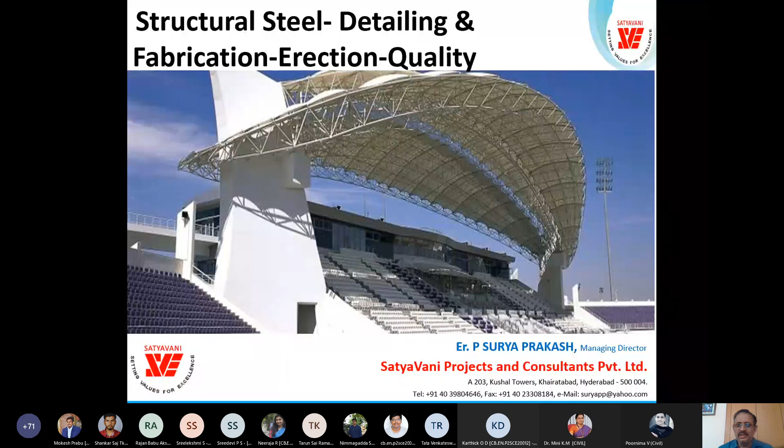However, today I'll focus on structural steel detailing and fabrication, erection and quality, because in structural steel, more than analysis and design, detailing is a challenge actually. That's why I choose steel structures detailing as the subject always. Of course, I teach design, I teach pre-engineered buildings, all these subjects, but I feel whenever we talk about steel, it's very important to talk about detailing aimed at taking care of fabrication, erection, and maintaining the quality. So these are the important aspects.

So the overview of my talk today is I'll give a brief introduction and I'll talk about steel structures, and then we'll move on to the topic of detailing engineering, which is about erection details, because when we talk about steel structures, it's not something that we do at site. We fabricate off the site in a workshop, bring those steel elements and erect them, join them on site. So engineering that method of joining, method of erection is a big subject actually. So we should understand these erection methodologies, and we should always do the detailing considering that erection.

That's what I'm going to explain with all the illustrations that I am taking today, with the drawings and photographs of the works done. But you have to be alert, my dear students, because I'm going to cover about 300 slides in a matter of 1 hour or 1.5 hours.

So please keep pace with me, keep noting the points, and raise your doubts at any time. I hope they can ask me questions anytime, madam. They can unmute and ask questions. Yes, they can. That's good. So you can ask me questions anytime, students, and I'll be more than happy to answer your doubts. But don't allow me to move forward if you have any doubt or if you have not understood any of my word or sentence. Okay.

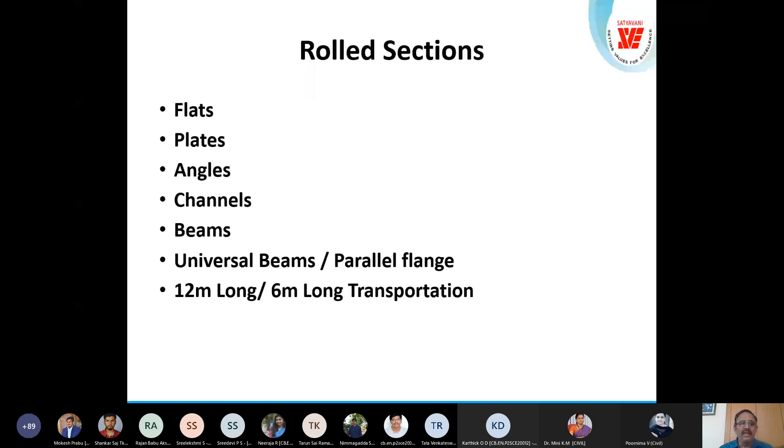So detailing now, we are coming to the topic. So we have modules in the structure. Sometimes we do the modular erection, like a truss. If you have seen a long span, 18 meters, 24 meters span, there we'll be using the modules of truss and erect with the erection joint on the site. So erection method determines how to detail. So we can do the welding for one segment or module, second segment and third segment, and we join these segments on the site as we erect, lift from the ground and put the erection bolts we call.

And we do the joint details bolted or welded depending on this erection method, and the cut lengths are determined in the detailing itself. When we detail the drawing, we determine the cut length, how much length we have to cut, 3 meter, 3.5 meter. And end details connection is very important. Fabrication, then galvanize. Why galvanize? Because steel has 3 disadvantages mainly. The first disadvantage is compression, buckling. Steel is not good in buckling, though it has enormous strength in tension.

In compression, it buckles, L/R ratio, based on the buckling curves, and so we have to take care. Second disadvantage is the fire rating. What is fire rating? You must be aware of World Trade Center. Luckily, because it is designed properly, the World Trade Center withstood the fire for the design fire rating. That's why people could escape.

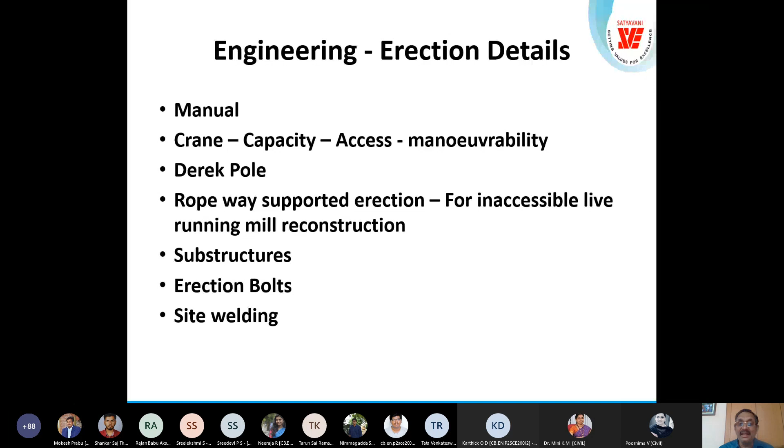And make the substructures, you must be aware, you can also Google Mohali. They have done a 10-story building in steel in 48 hours exactly in India, Mohali. So it is done by using the substructure concept. That means the entire floor is fabricated and assembled off-site, and floor-wise it is brought and erected. That is another biggest technology that is available. And erection bolts and site welding, we have to take care while doing the erection detailing.

Each element fabrication detail we have to do, that is called the shop drawing, because the fabricator in the workshop will blindly follow the fabrication drawing, cut the length and cut the ends, edges, punch the bolts and all that. I'll show you the drawings, you will understand better. I'm taking more time initially explaining this because when I show the pictures, you can capture what I'm saying. Another important thing I want to tell you is, you must make a practice to write whatever you hear.

Now, whatever I'm telling, you must note. That's why I told Poornima madam to inform you to keep the pen and book with you so that you will write whatever I'm telling, so that it will be registered in your mind. And when I show the pictures, I'll run very fast. I'll probably cover all 250 photographs and drawings in 30 or 40 minutes. Okay, be ready. So you remember all these things so that you can correlate with what I show as we move forward.

And fabrication process is cutting, bolt hole punching or drilling. We can do punching up to 12 mm thick and drilling beyond 12 mm. And gauge lines, bends, end cuts, grinding, welding, and a schedule of fabrication line also. You know, there is a Tekla software in which you can schedule the whole fabrication, stacking, transportation, erection also. And each flange we will give the view and or web, you know, in case of beam. And these drawings are made in 1:10 scale.

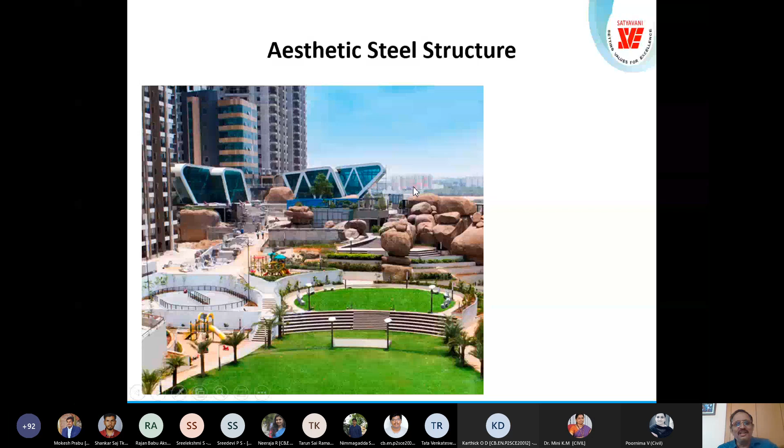And this is the closer view of that structure, steel structure and boulders. You can see nature. We built the structure with the nature. And you can see the bent shape of this and the bent sheets and a truss, huge truss in a steel frame, you know. And the architect has used the aesthetics of this, and we designed matching his requirement. And this is another photograph of the same. And this is during construction. You can see how it looks during construction. And this is a deck slab, and this is a huge 60,000 square feet of clubhouse.

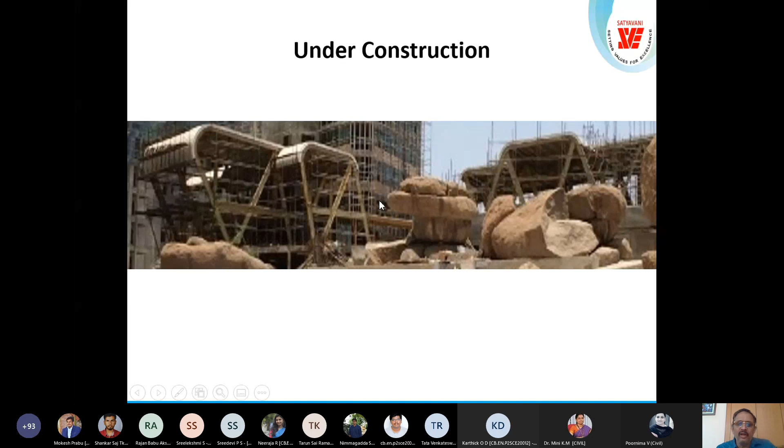And we also have a seven-storied guest house, again on the boulder zone, without conventional foundation. So please, and this is another recent edible oil refinery project we completed in Andhra Pradesh, in Kakinada, and this was in Hyderabad. And this is in Kakinada. We did a chimney and all these refinery structures, boiler structures and all. Mostly for these industrial structures, we prefer steel because of the convenience of erection and flexibility in planning and design. So these are the other photos of these steel structures.

Here you can see the bracings, the steel bracings. We have X bracings, and this is a diamond here. And normally we have two types of structures. You know, you have a framed structure. In a framed structure, please, what I'm telling now is a very important point which many people mistake or make errors in, and failures happen. This is very, very important. Please note. So here, this beam connection with the column, we have to detail as a moment connection. Otherwise, you can see a portal with 4 hinges is unstable. You all know. You can't even analyze. So either you have to introduce the bracings, or you have to design it as a what you call moment connection.

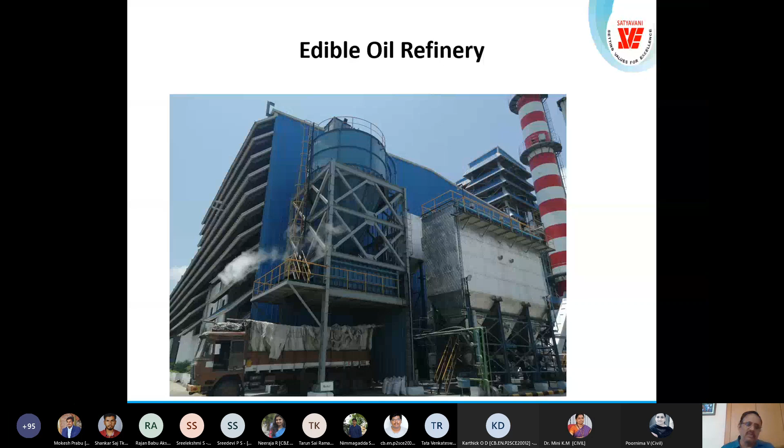And here you can see the bracket. This is a strut, and this is a tie and strut model. So in steel structures, if you know the method of joints and the method of sections, you'll be able to analyze very easily. In fact, it is very accurate. Even if you do all the analysis on a computer, you get the same forces. So I can analyze and predict the forces very quickly.

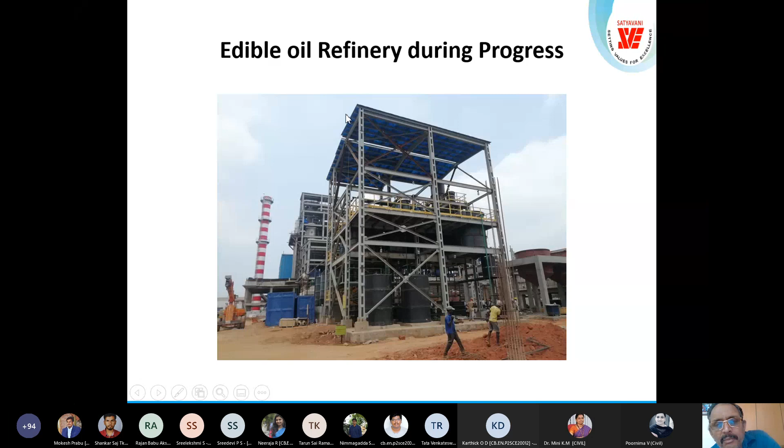And this is a normal floor with beams and a deck sheet. This is a GI deck sheet. We put the concrete on top of it. It's a column, beam, and the rafters, sub beams. And you can see these are tapered again, castellated sections. We have the simply supported design, so we have the maximum moment here, so we have put the tapered section with maximum section depth here. You can see the varying depth. So at the support we design only for shear. We don't transfer the moment to the web. Whenever you are connecting to the web of the beam, you can't transfer the moment. The web is primarily a shear member, you know, and flanges take axial tension and compression. So that's the beam actually.

Any beam will have how many forces? Axial force, shear force in 2 planes, and you have the flexure in the primary plane, flexure in the secondary plane, and torsion. In open sections, torsion resistance is negligible, they can't resist it. So we cannot transfer the torsion, and as per the code, any compatibility torsion you can ignore actually. That's why we give it as a simply supported beam. So as a structural engineer, you can choose how you want it to behave actually. So we give only the shear connection here, as a simply supported beam, and that is the most economical.

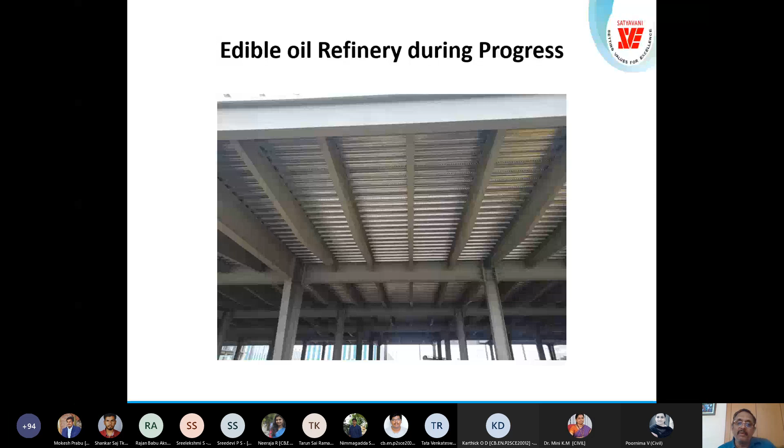And it's a composite deck actually. So this deck sheet is welded to this, and the concrete also is connected to this beam by shear studs, so that the compression is taken care of by this concrete, and tension in the slab is taken by this. I have designed even a deck slab without reinforcement actually. I just put the deck sheet and concrete with fiber reinforcement. That is also possible. So these are all the structures. Here you can see a nice parallel chord truss actually, beam action. So shear is taken by this bracing, and axial force from flexure is taken by the top chord and bottom chord. So these are all the different types of structures you can see in this.

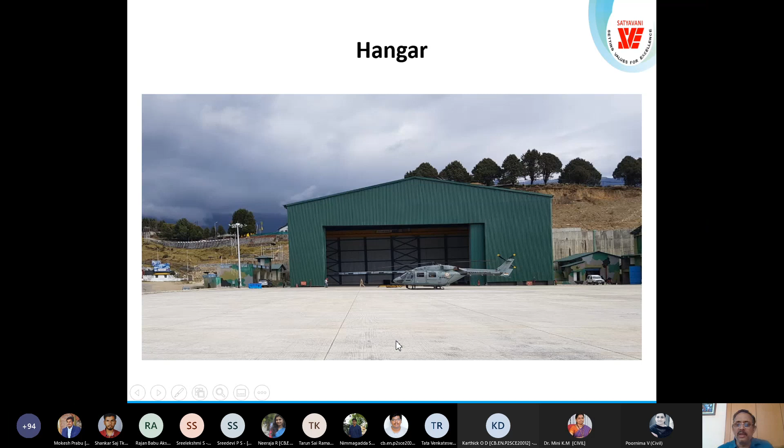And this is another. So this is another hangar structure we designed at 13,000 feet above mean sea level. That means the temperature here will go below minus 30 degrees. And we designed this with doors of 30-meter width. It will collapse automatically. So that kind of steel structure is also interesting. It's a 40 meter span where these defense helicopters will be maintained inside. So this project we have done, and this is during construction, a very interesting structure. And we designed heating inside, and it was a very interesting concept for me also. I learned it for the first time about 3-4 years back: normally in industrial buildings we put the skylight.

You know, in defense buildings they don't want skylight, because at nighttime, when you have the light, people can see. That is a disadvantage of skylight. So this is the first time we designed without skylight in a large steel structure. Very interesting. So many things we keep learning as we work.

So you must only pray to God to give you the opportunity to work, then the rest of the things, knowledge comes with it. You only need to possess the intellect required for that. So this is the closed door, you know, I told you, 30 meters automatic sliding door. This also we designed. Very interesting.

And now these steel sections, I was explaining angles, T section, channel, I-beam, and double. These are built-up sections, you know. This is back-to-back or star angle, and we have double beam with built-up section plates, and we have double channel box section or batten section, and we have the circular or round hollow section, square or rectangular hollow sections. These are all the types of rolled sections we use in the design.

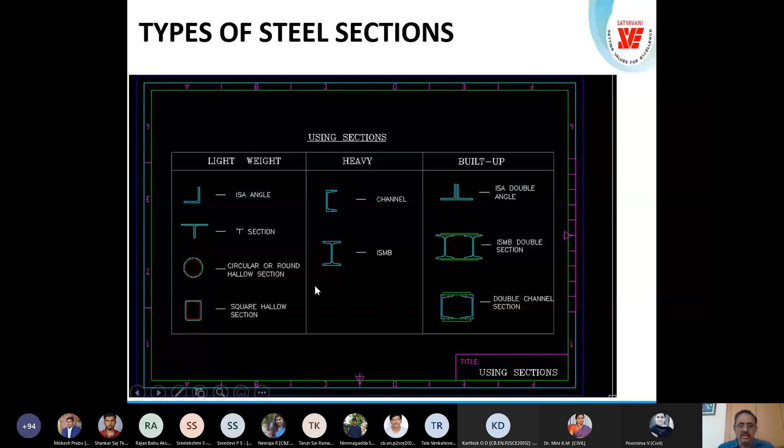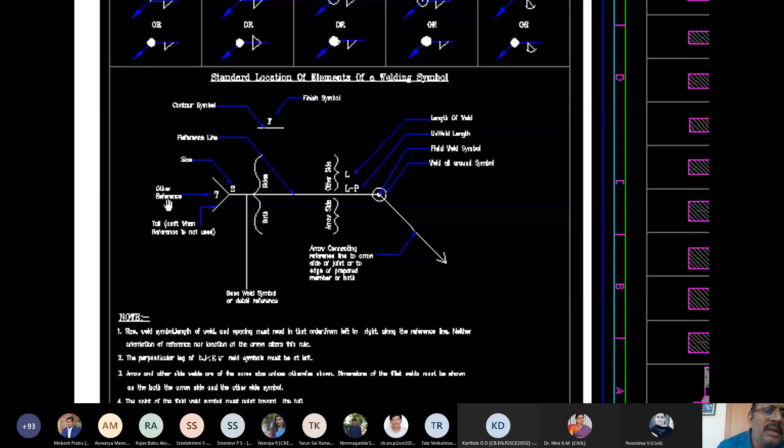This is the arrow I told you. On the arrow, if you show which side is this, and on the same side of the arrow, it means you weld where I have shown only. If you put the detail here, you weld, and the length of weld we indicate here, that is 100 mm or 200 mm, and this is the length of weld, and field weld or all round weld. So this spot is field, that means on the field actually. So these are the details you can see, and of course this is all given in the code. I have just reproduced what is given in the code only.

And so you can see this is the fillet weld. I'm showing you here, you will understand better. And these are 2 members you have to join. This is a square butt, and this is single V butt. You can understand from the figure. That's why the figure speaks much more. And double V butt weld, and a single U butt weld, and a double U butt weld, and this is single bevel butt. You can imagine the difference here and here. Okay, here you are welding 2 equal thicknesses, and here you are welding 2 different thicknesses.

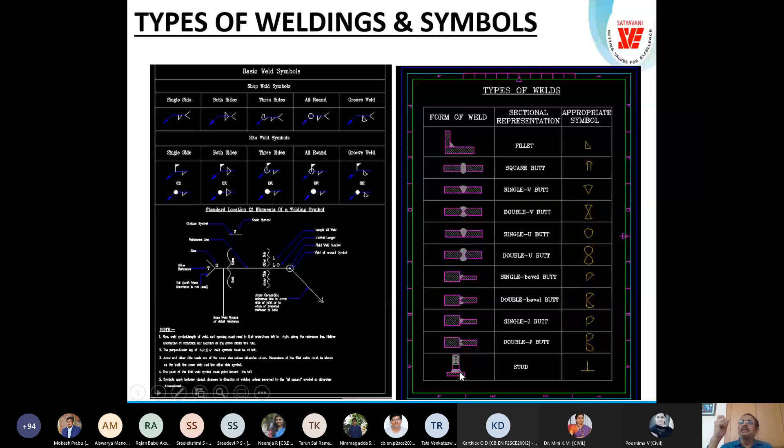That's the difference. And here it is double bevel butt. It's all decided depending on the capacity required, the force that you have in the member. And this is a stud weld. This stud weld we use for shear studs, I told you, in the composite decks. So it is more zoomed, and you can see this 45 degree cut, and this double V weld, and this is a vertical joint, and this is the 8 mm and 10 mm.

This is how we do it, and 12 mm and over we do like this. So this is a very interesting thing you must remember. Bolt diameter and gross diameter of the hole: that means a 12 mm bolt, you have to have a hole of 13.5 mm. That 1.5 mm is the tolerance. And when you go to 20 mm, it is 22 mm, 2 mm tolerance.

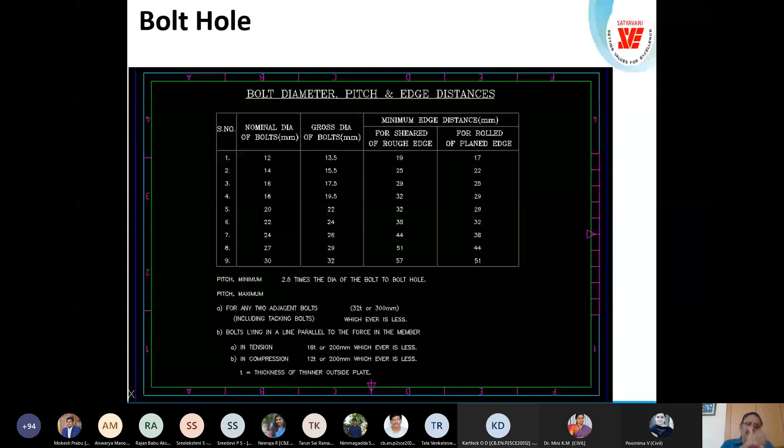And minimum edge distance is also given here. That is for the bolt hole to the edge of the member, if it is a rolled edge and if it is a sheared edge. Sheared edge means you cut the angle. So all this is very important.

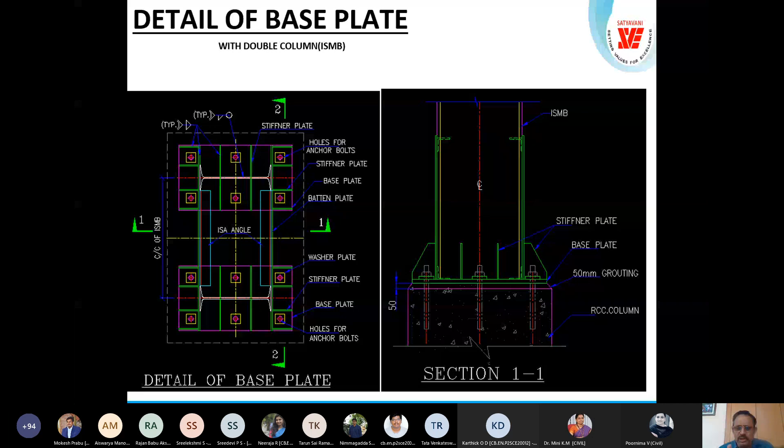And this is called the grouting. These are all very important elements. Whatever I'm showing is the most important. You must remember, and if you have any doubt, you must ask. Okay. And this is the elevation of that column with the base plate, and this is the batten plate, and

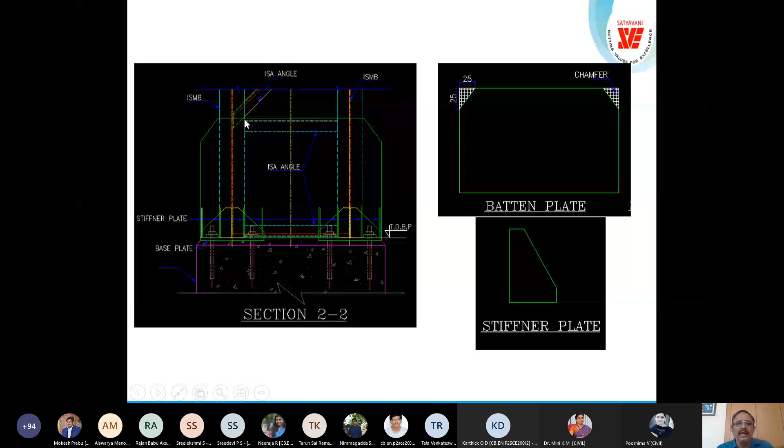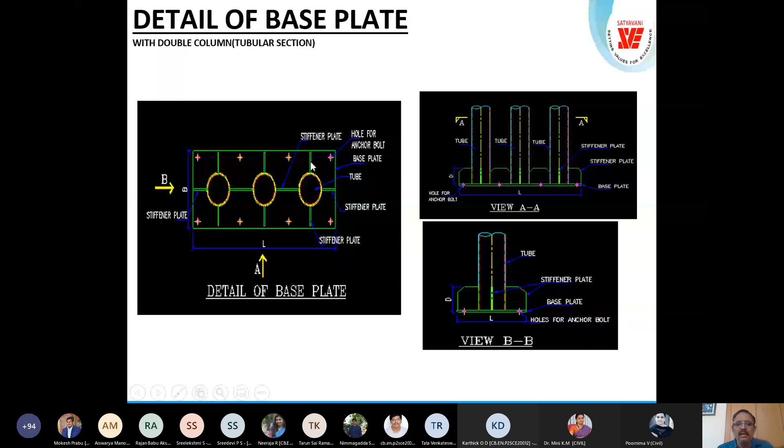these are the stiffener plates. And this is the plan of the base plate, and these are the stiffeners, as I said, and this is the batten plate. And you can see this is 2 ISMBs used as the column. This is the tubes, circular tubes. This is a bit distorted, but it's a circular tube, not elliptical. And 3 tubes are made as a column. And you can see stiffener plates, and this is called the pedestal.

Why I'm showing this is, whenever you use a steel structure, normally the foundation we do in concrete only. Though you have a grillage foundation and all, normally in practice we use the concrete structure. And the interface is anchor bolts and the base plate, and the transfer of the compressive stress from the base plate steel to concrete is through high strength grout. Otherwise you will have stress concentration and the concrete gets crushed. So it's very important.

You can see the base plate: first we cast this concrete without the base plate, but we put the template to keep these bolts in position, and we do the concreting. And after the concrete sets, we bring this base plate assembly and put it on these bolts. This is the foundation layout normally for this, and then this is the detailing of just a bolt. I'm sure it takes ages for you to understand. I understood this about 20 years back only.

And this is the bearing anchor plate or the nut here. You can see the welding. How much detailing is there? And this is the bolt that is embedded in concrete. Here also it is embedded, but we give this sleeve, pipe sleeve. It is called pipe sleeve.

And we provide the pipe sleeve because of the adjustment for the tolerance in the base plate. When you do the concreting, this bolt may be moved a bit here or there. So what we do is we put a pipe sleeve to this bolt, and this is the base plate actually. And this is the nut, and this is called check nut, and this is called leveling nut. So many things, you must know. And this is the flat washer. So you have to adjust the level with the grout.

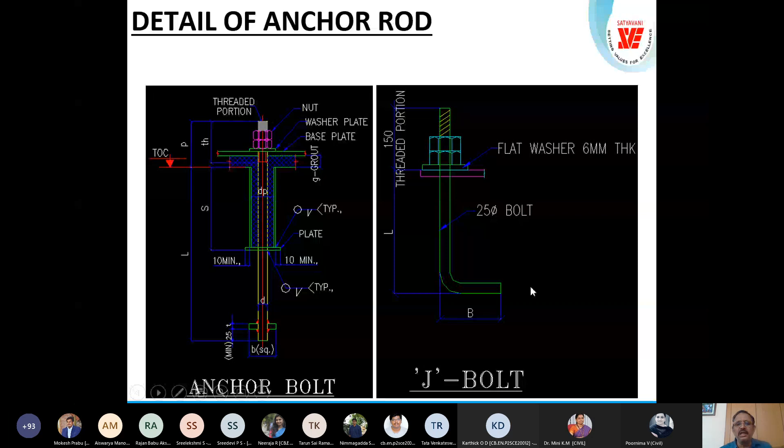You have the option of using anchor plate or J bolt. Both can anchor, that is for the uplift resistance. So these are the types of columns: batten plate and lacings. You study this in your steel structure, but this is the practical detail that we have used in some of the industrial structures.

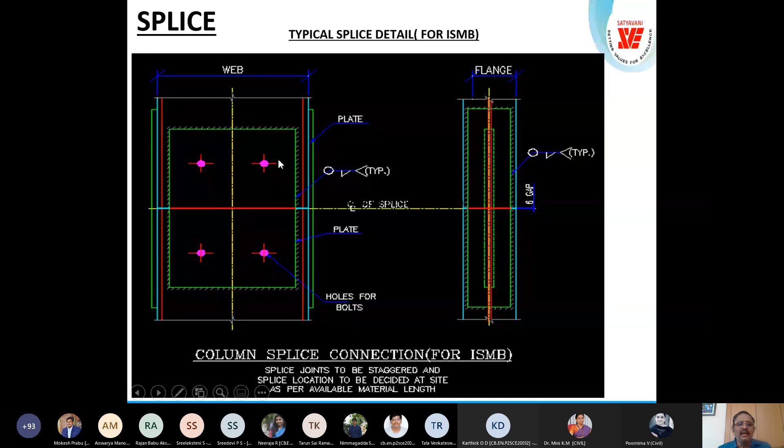And this is the splice connection, very important. You must know that in the splice, you will have the flange plate, web plate, and bolted web plate for the erection. And then we do the welding. After erection, alignment and all is done, we do the welding. And this is the splice plate web and splice plate flanges here. So this is the elevation and this is the plan. And for every steel structure, you must show this elevation, plan, and side cross section, you know.

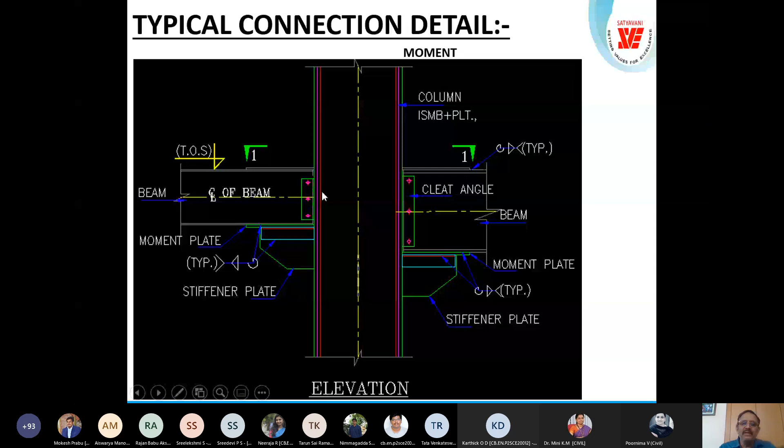And this is the typical connection detail between the column and two beams. You can see this bearing cleat. This is called the bearing cleat. And this is the flange plate. And this is the moment connection. This is called the moment plate. So if you don't have this moment plate, that means it is a shear connection.

And so this is if you have a laced column, how do you connect? That is always a doubt. So you have a plate there, and you put a diaphragm plate across. This is the plan. You can see the section AA is here. So this plate will be acting as a diaphragm for the moment transfer. Whenever you have moment transfer, it will not be in plane necessarily. If it goes a little bit out of plane, you need this diaphragm action. So you cannot just put the plate in one plane and then connect these beams here.

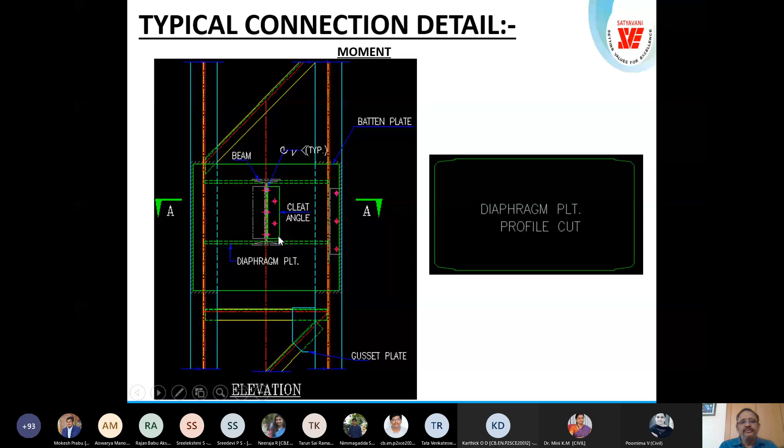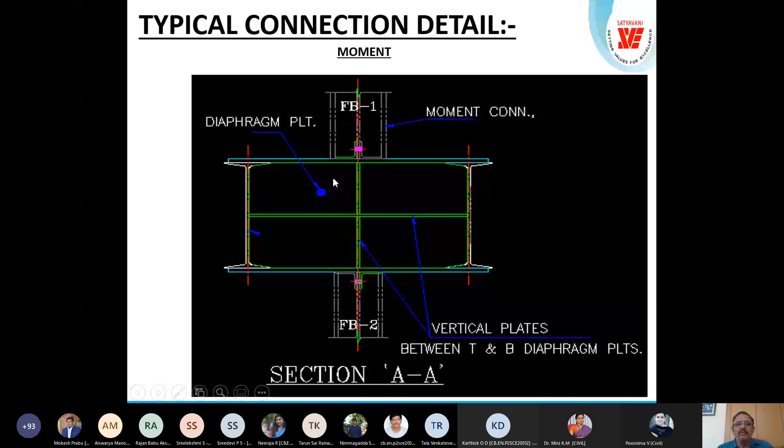And this is more in detail, you can see. These are the web plates, web stiffening plates, and these are the beams. And this is the column with a diaphragm plate and moment connection. And these are the cleat angles, and these are the shear connections, and this is the beam, and these are the columns. Column details, web plates, and these are the connection details. This is the stiffener. Very many details will be there.

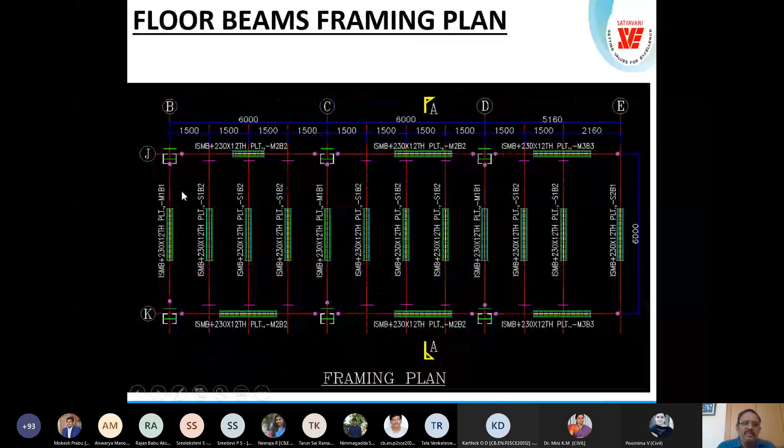I'll zoom it here. Unfortunately, this text, my people have just extracted the JPG from the AutoCAD. That's why the text is not coming. If I save as a PDF, probably I could have shown you better. But anyway, time also is not enough. I'll run a bit fast.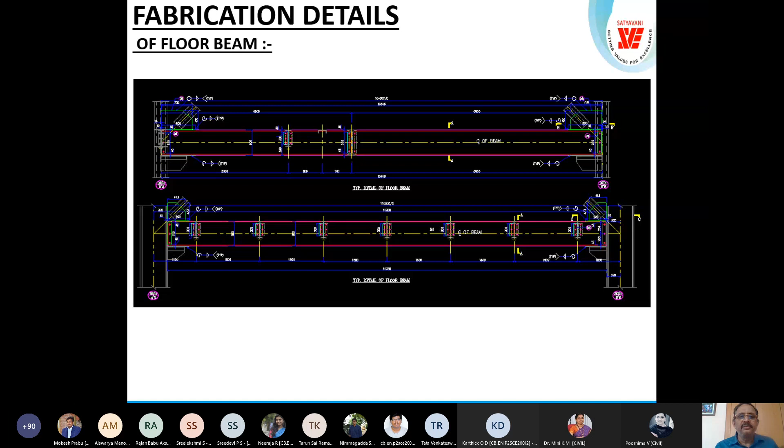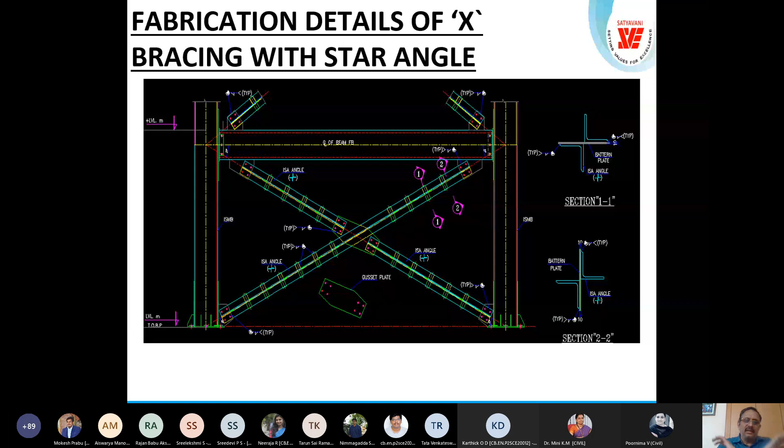And this is also a moment connection. You can see here. And this is if you have a smaller beam connected, the deeper beam connected to the smaller beam. So this is the detail. You can see we have put the cleat connecting the web. And these are the bracings. Though it's not a very good detail to my liking, I prefer without breaking the angle here. So it should be like this. That means here I don't want this angle to be broken. That's why.

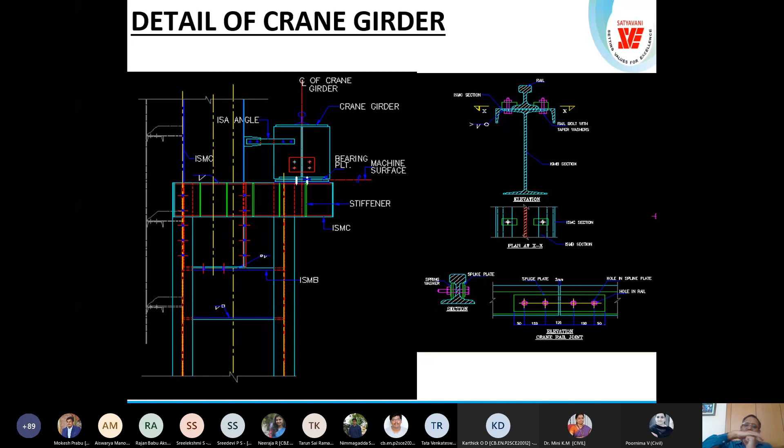And this is a X bracing. It is called star angle. These are the two angles like this, star angle. And this is a gantry beam, crane girder, and you can see the lateral support here. And this is why we use a channel in the gantry, for the lateral thrust. You need a moment resistance in the second plane. That's why we use a combination of beam and channel and a rail.

And these are the trusses, very interesting. These are the traditional trusses that were used. Nowadays we hardly use these trusses, we use only the portals because erection and fabrication is simpler for the portals.

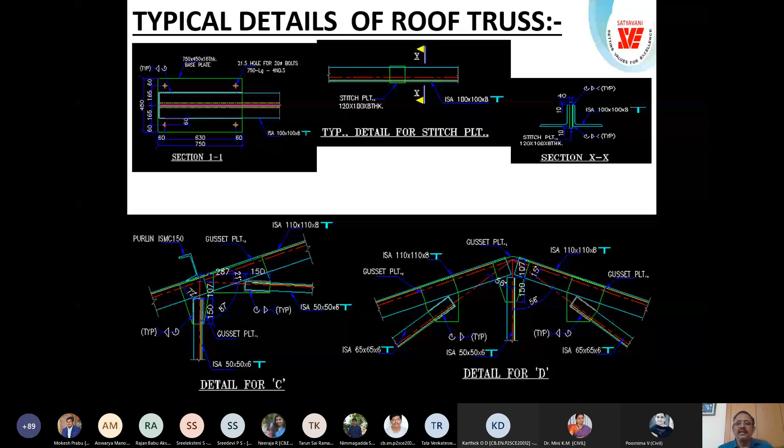And these are the typical details of the truss. These are the joint details. Yeah. These are all the detailed drawings of the trusses. And this is the general arrangement of the roof truss bottom chord plan. You see how many bracings are there.

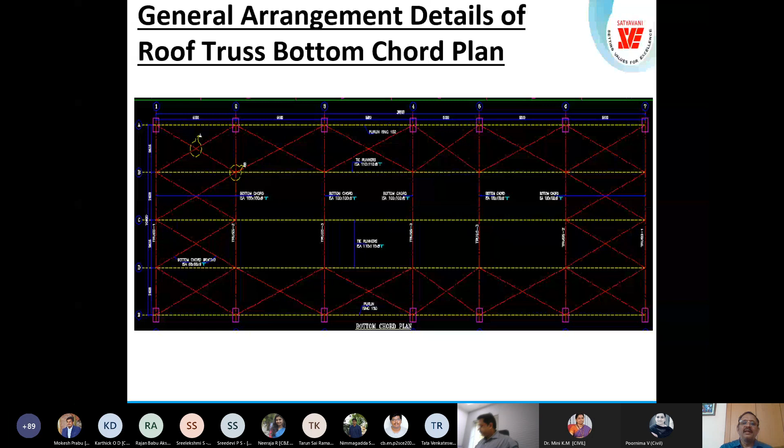Nowadays, people are doing without this bracing and the structures are collapsing during erection itself because they are unstable without these bracings. They're also called the wind bracings. And these are the sag rods in the rafter plane actually. These are called rafter bracings and they have the purlins and sag rods.

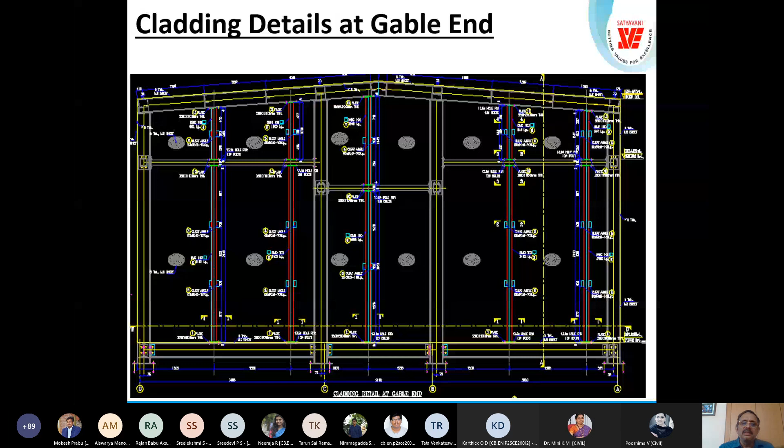So these are the different types of sag rods. You can see these two purlins and sag rod. And this is the gable end detailing. We put the cladding at the gable end and we provide the runners and girts for supporting the sheeting. And this is the gable end typical detail.

So this is the channel. Unfortunately, I'm not able to show my cursor. I hope you'll be able to make out. I'm probably not prepared well.

And this is the corner column, the most complex detail. You have the two planes meeting here at the gable end and the long side. So this is the detail of the cladding runners or girts joining at the corner. These are all very intricate. Probably many people don't like to even share. They think it is their intellectual property, but I feel it's engineering. Everybody can do it if you spend a little bit of time. Better we save that and invent better things than doing the run-of-the-mill type.

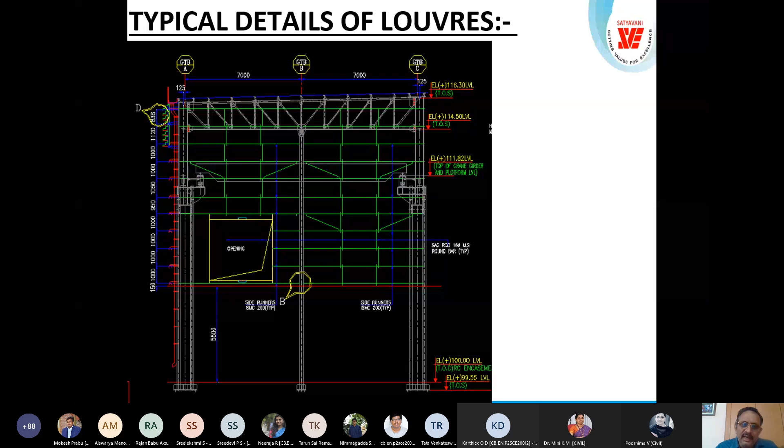So here it is the louvers. Every industry will have the louvers. So I'm showing you the details of louver runners. And here you can see the louver detail, cross section of the louver. So much of engineering we did. So these are all the things. And openings. If you have a window opening in a factory with the cladding, how to detail. We did all this even before pre-engineered buildings came. In pre-engineered buildings, all this is taken care of by the vendor. Of course, if you have to work for the vendor, you should be able to.

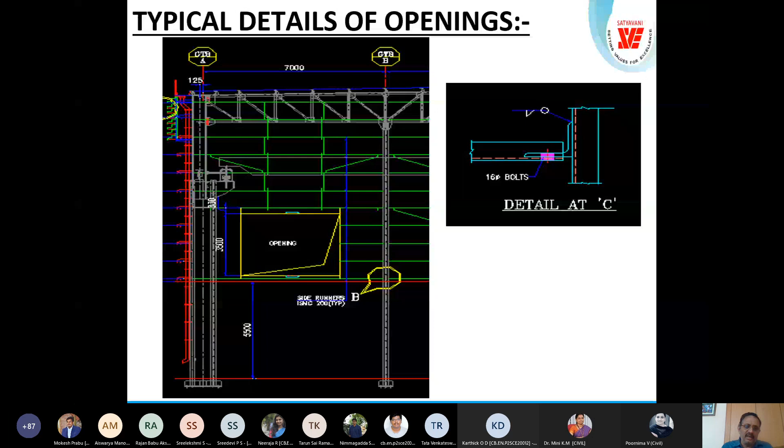So we developed these details of flashings and fascia, and mainly flashings are important to prevent water ingress into the building when you have the opening window, and its interface with the cladding. That's very important. So these are all the details of those windows and claddings and downtake pipe. You can see here the gutter, the rainwater collection, gutter, and then downtake. These are all the detailing. You can see I have given all the details very clearly. Here the gutter, downtake, and the bill of material. These are all very important.

Sorry. So these are the notes in a structural steel detailing drawing. Notes are very important. We must define all these details in the notes, like bolts, what type of bolts, grade of bolt. We have 5.6 grade bolts, 8.8 grade bolts. And for normal bolts, we can use 5.6. And welding procedures as per IS 816. And electrodes should be as per IS 814. And butt weld and steel grade 2062 for high grade of steel.

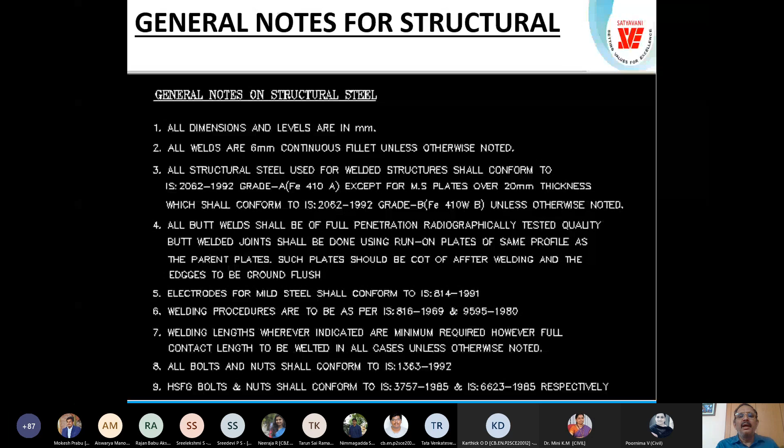And so these are all the notes and tolerances, the type of symbols that we use for the bolts, 12 dia, 16 dia, 20 dia. You can see the note number 16. And the size and shape of the gusset, and all holes should be 17.5 unless otherwise mentioned. And DFT, 2 coats of zinc phosphate in phenolic alkyd medium is 40 microns coat. This is called cold galvanizing. 2 coats of synthetic enamel paint. So we are specifying, because painting is very important to prevent corrosion, as I said.

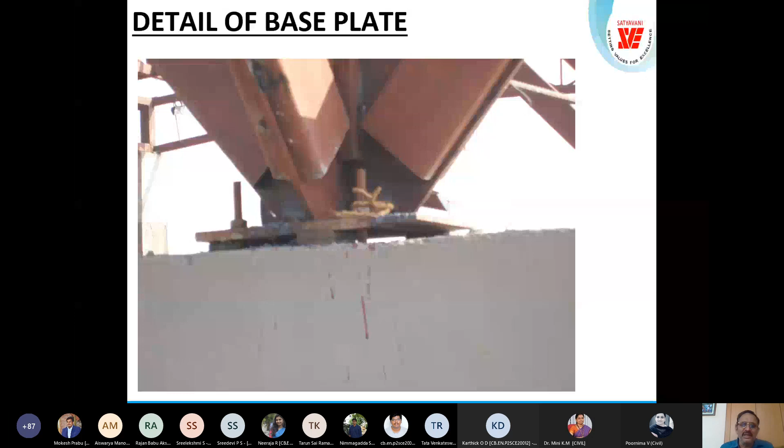And these are the notations or abbreviations that we use. FGL is finished ground level, NGL is natural ground level, bottom of steel, top of base plate, top of steel. All these notations we use and we define in the notes so that people will understand our language. So now you can see this base plate, how bad. I'll be showing some of the photographs, bad photographs. You should not do like that. Because when I go to the site, if it is wrong, I take a picture. And I want to show you what not to do also, not only what to do. So this is the pre-engineered steel structure. You can see the base is hinged here and top is fixed.

And this is the complete pre-engineered structure with roof sheet, skylight, gutter, and side cladding with sliding doors open, and gutter and fascia and downtakes behind. And these are the cold formed, cold rolled purlins, Z purlin, C purlin, they are called, and you can see. And these are the rectangular hollow sections used for fabrication of a truss.

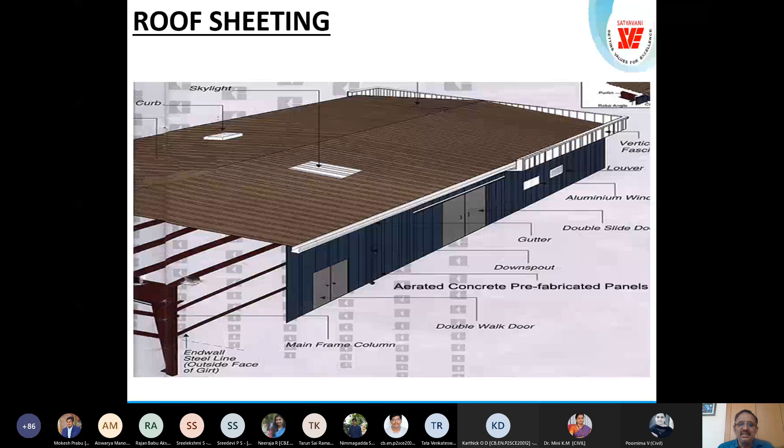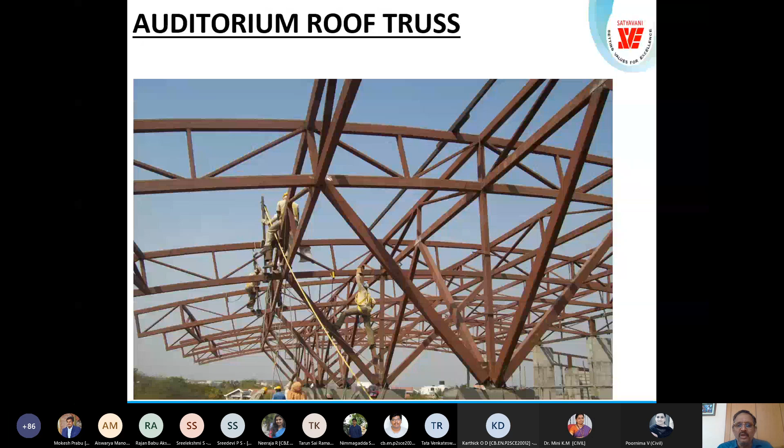We use this RHS where we predict some torsion in the structure. Because of this curved shape, we have used the hollow sections because if it is open section, it will not be good in torsion. You can see this is the curved trusses.

And pipes also we have used, you can see the complicated 3D joint, how we have detailed, and there are no gaps. And you have to develop that profile cut, one circular surface and another circle joining. And that is the development of surfaces we study in the geometrical drawing. And this is another profile cut of steel joints, you can see.

And this is the base plate, gusset plate. And this is what I said, interface between concrete and steel. So here I can't give accurate position of the bolt because the bolt position is dictated by the reinforcement in the concrete column. So that's why we allow the slotted holes. And after that, we pack it with the packing plate.

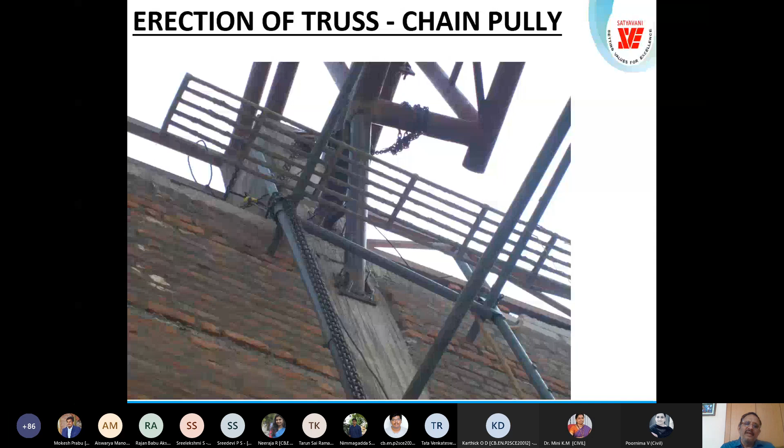And these are the members before erection. You can see the end flange with the bolt holes for erection. And this is the welded joint for the truss, a closer view. And this is the truss connected to the concrete frame. And truss sitting on the concrete column. And this is the curve. And we used both square hollow and pipe sections. And this is the erection. You can see the derrick pole and chain pulley arrangement here for lifting the trusses and all.

So these are the roof sheeting, profiled sheet it is called. Normally Zincalume, zinc and aluminum alloy is the material that we use because we have seen in olden days asbestos sheets. They are very bad because asbestos fiber can cause cancer, with continuous exposure. And then GI sheets, we see a lot of corrosion happening in the GI sheets. So finally, now the current trend is using these Zincalume sheets.

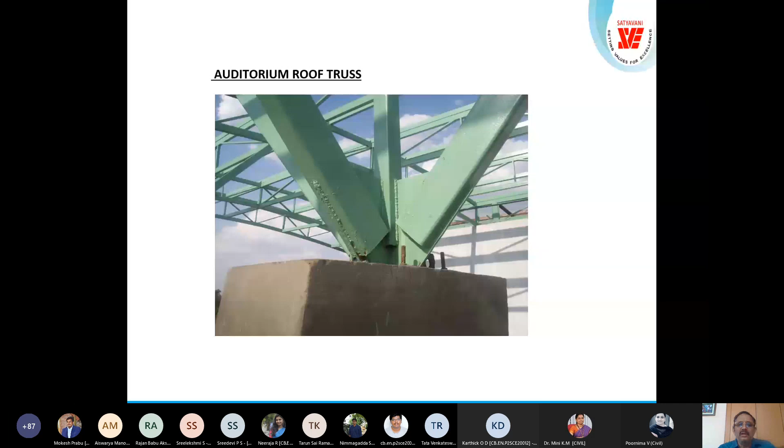And this is the truss sitting on the columns. And this is the space truss sitting on the column. And this is after painting. And this is the after. And another industrial shed. We have done this column beam junction. And this is the detailing of the columns and beams. And column fabrication drawing. And this is the base plate, welding details.

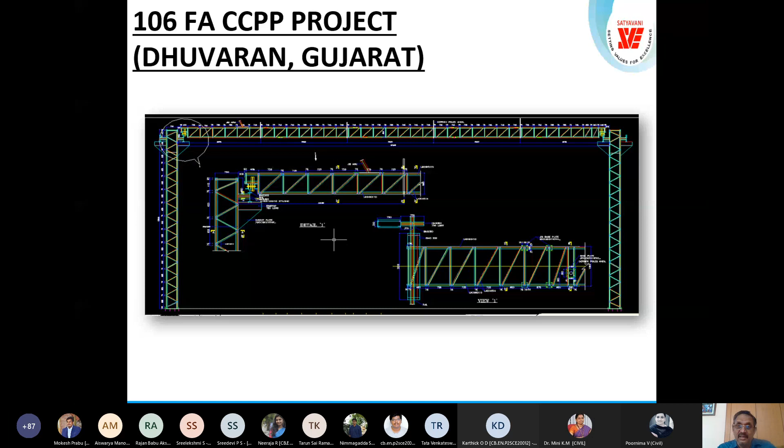And this is another interesting shed we did in Vizag with a profile sheet like a shell roof, you know. There is no purlin, there is no rafter. It is directly the sheet itself will sit like a shell. And this is another power plant we did in Gujarat. This is the roof truss like portal truss. Lot of industry, and this is the gantry girder in lacing actually, latticed gantry girder and laced column.

And this is before fabrication. This is how the cut lengths come, the beams. And this is how we have to stack them properly before fabrication. And this is another interesting FFE mineral we did in Orissa for aluminum ore processing. The 47-meter span portal with a 3D latticed truss, purlin actually, latticed purlin. Very interesting structure.

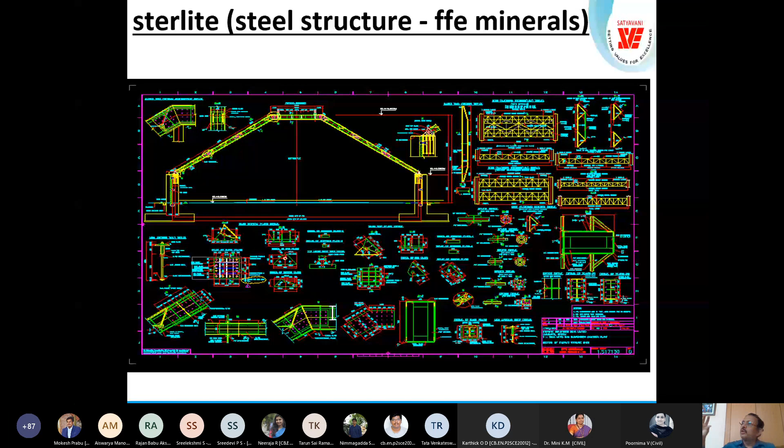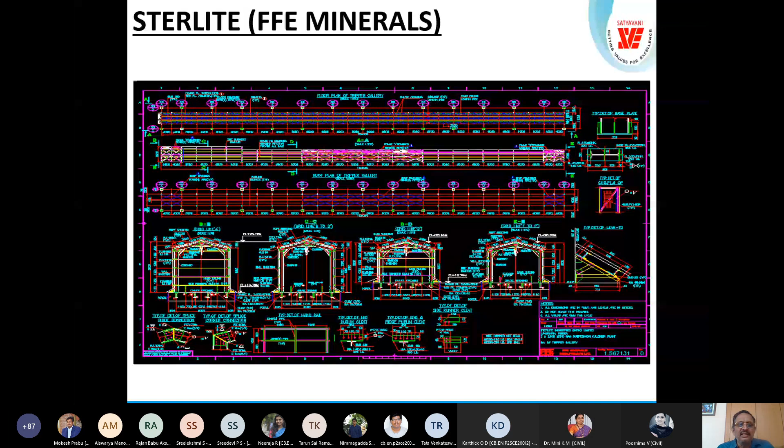In fact, this is the transfer houses. You know, when you have these conveyors taking the ore, so you need the transfer house because conveyor cannot travel 10 kilometers like that. So we'll be having the transfer house, one conveyor to another conveyor transferred, and finally it comes to this ore stacking area. And this is the conveyor gallery actually. All this we had the opportunity to work. And this is chimney detailing.

And this is the photograph sent by the client saying he liked this picture long back, of course. And you can see normally we give the truss latticed and purlins box section. Here we have given reverse. Truss we have given box and purlin is very economical. And the top box is a conveyor gallery. So iron ore will come and the shape of the truss we have given to maintain the shape of this.

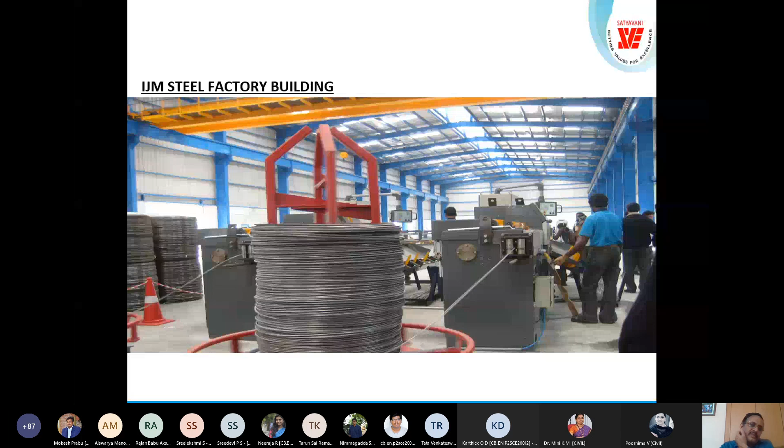Another steel factory building. So these are all the detailing and this is the photograph of the factory. And skylight, you can see this is the daylight without lighting. So such is how we design the lighting also. And this is another multi-story building for ITC, an Amazon type of structure, where we store the logistics materials and all that. So these are the photographs to completion.

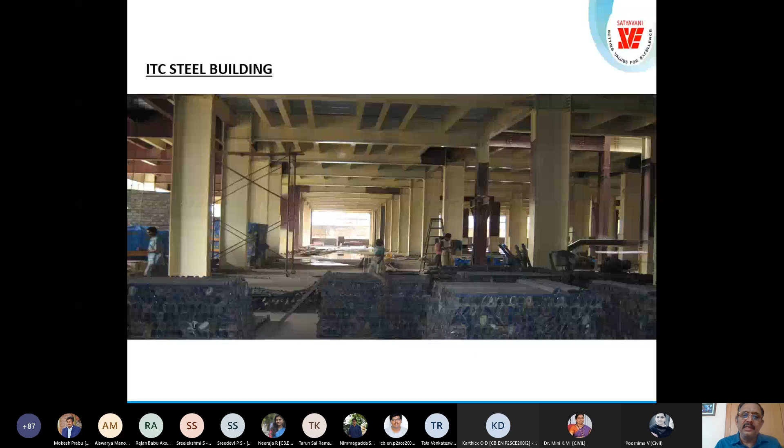And this is another interesting project we did, 20-meter high with 10-meter floor height. And we have used the composite deck 20 years back. This one is done 20 years back and still performing in the coastal area of Chirala. And this is a cross section of this beam, and we have used all the moment connections without bracings actually. And here you can see the gable end, 67-meter wide gable end, and 20-meter high. And this is the plan of the building with 6 staircases.

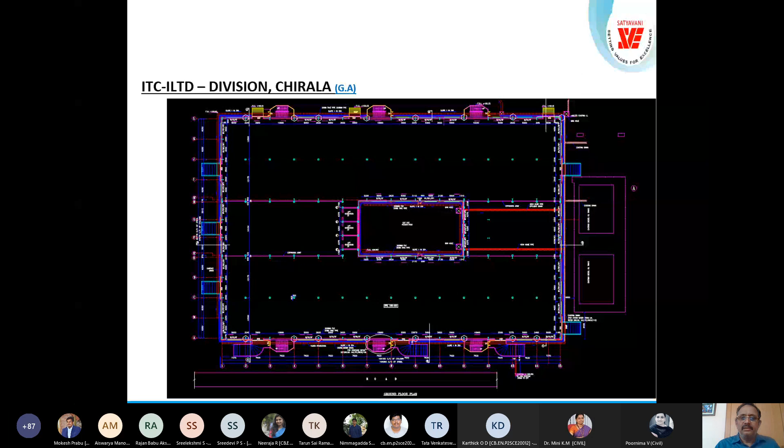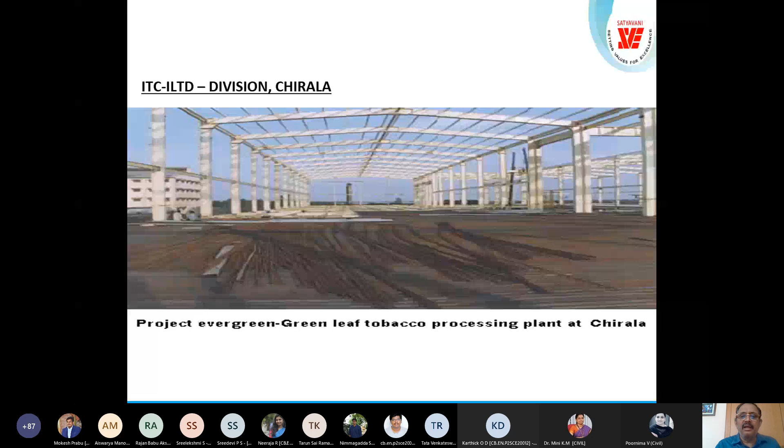The staircase detailing, and this is the glazing detailing for the staircase for lighting into the factory. And this is the flooring detailing, and this is the conveyors, and this is the structure. You can see the closer view of the structure. And this is the conveyor getting the material into the industrial warehouse. And this is another Kirby 3-unit building we have designed, and you can see the photograph. This is what I was telling, 360-meter long building with accurate alignment, erection, and quality actually.

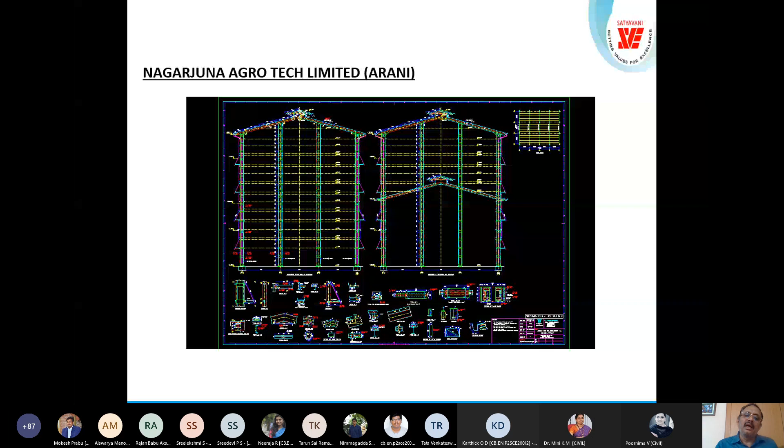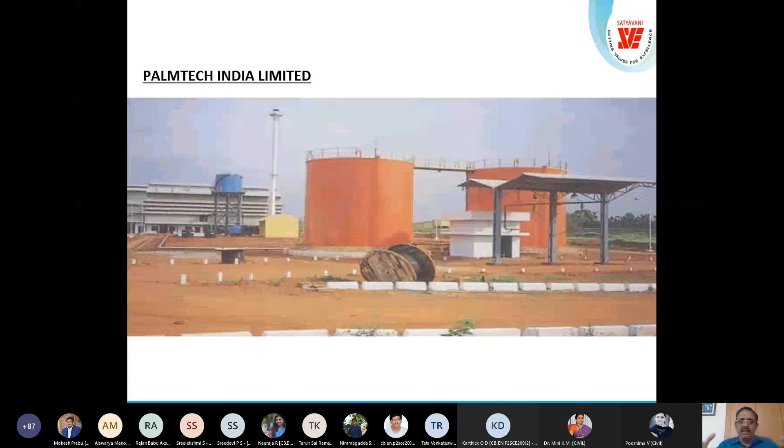So this is another edible oil refinery we did in Kakinada, coastal area. And these are the trusses we used in another palm oil mill, and detailing traditional trusses and laced columns detailing we have done. And this is another palm oil mill, general arrangement drawing, columns detailing, and canopy structure, staircase detailing. And this is the photograph after completion. Very interesting. And this is the oil tank, oil farm it is called. So this is another interesting structure where we transfer the load by hoop tension, not by bearing actually. So membrane action and all.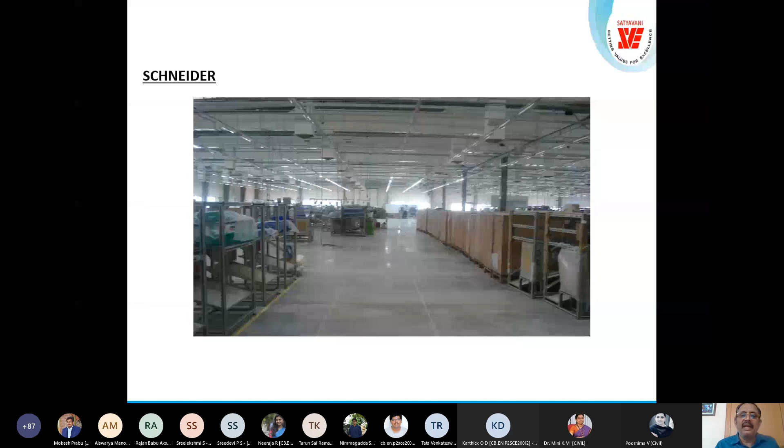This is another Schneider Electric assembly building we did long back. And this is the internal photograph of the skylight strips. So this is the skylight, you can see strip skylight and 45-meter long sheet without joint we have used. And this is another special structure we did, the skylight for the art gallery, inverted cone. And we have done this closer view of this. And then stadiums, Games Village, National Games Village in Hyderabad, we did this trusses detailing and all.

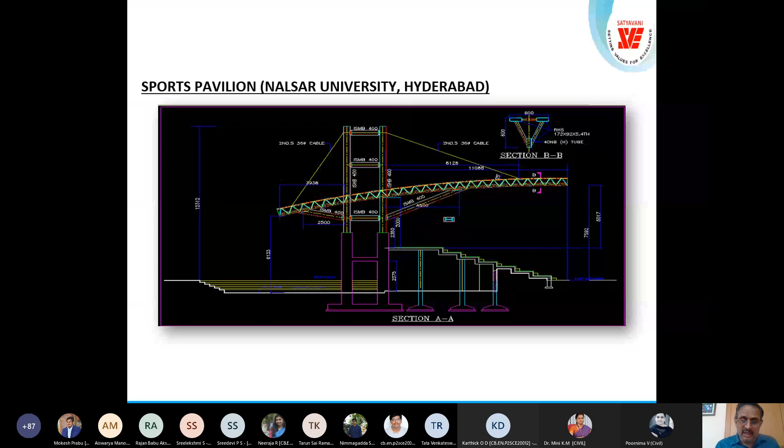And this is another dome sitting on 4 buildings with the bearings allowing the base movement. And this is the view of the dome, Income Tax towers in Hyderabad. And this is another distillery project we did. And this is the roof truss. So now, interesting part, as I said, is towers, transmission towers, microwave towers, and microwave poles.

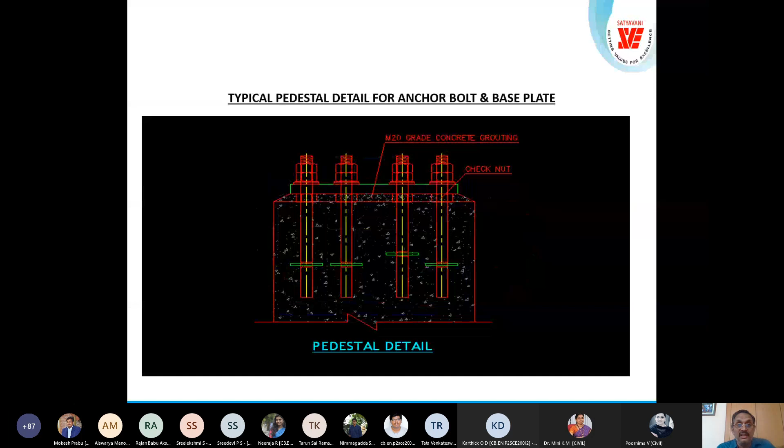So this is the stub detailing, we erect the towers and stub template arrangement and all that. So these are the different types of stubs. I'm not going into details of this because this itself is a specialized subject, but I'm showing you the extent of detailing that is required even for such simply looking towers and the base plate arrangement and all. So this is the complexity of the tower, 400 kV suspension tower. And this is the detailing of one panel, how much it will be going.

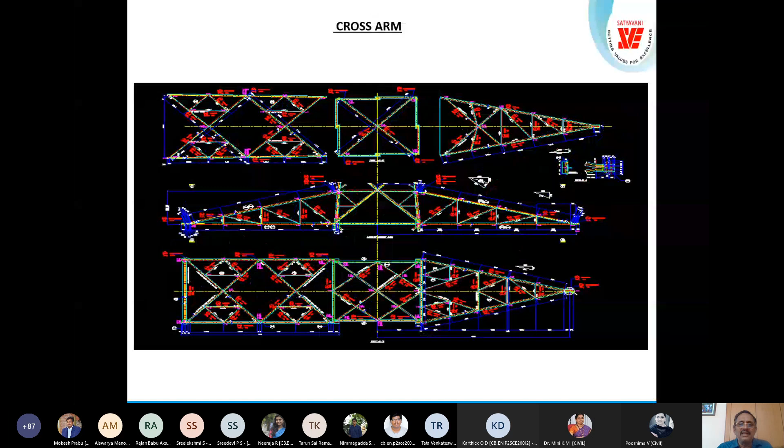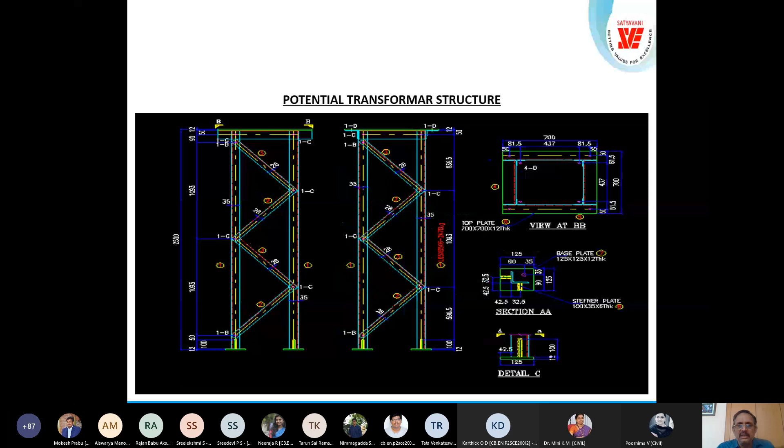So these are all the detailed drawings of these towers. This is called cross arms, and this is the angle tower cross arms. And these are the peak. It is called ground wire supporting peak, and triangular towers. We did different types of towers, and these are the joint details. And this is the switchyard or substation structures, gantry structures we have. Insulator structures, CT structures, and lightning arrestor, post insulators, and potential transformer, wave trap.

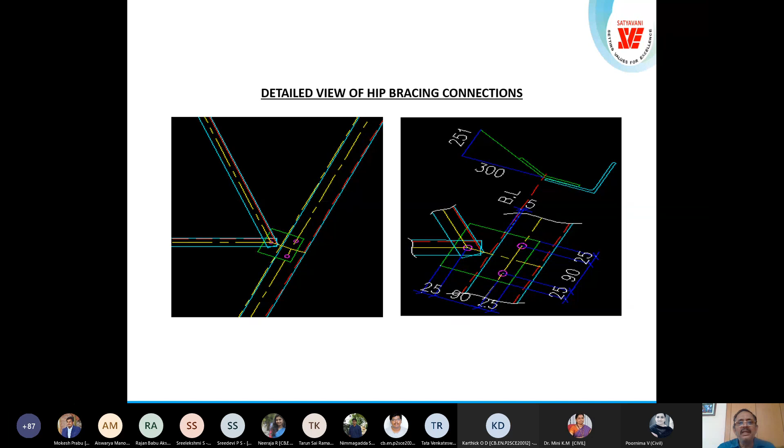All these structures are detailed, and it is very important to master this detailing because only a well detailed structure can be erected. You can imagine if I told you we have done about 2.5 lakh towers, means about 2.5 million tons of steel only in towers. And we did another 2.5 million tons of steel in other structures, buildings and industries. So that is the opportunity. Every year 90 million tons of steel is produced in India. So imagine the opportunity you have in steel.

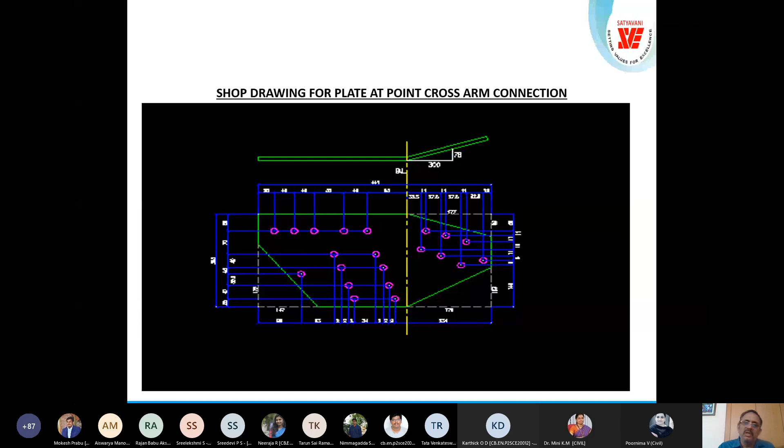But I always say that don't constrain yourself in your career to only steel or concrete. To be an engineer, you should have the knowledge of all types of structures, all types of engineering, erection, fabrication, quality, and you can see the shop details. And you can see the beveled cut. BC is beveled cut, and so you can see how a beveled cut looks. And here cut flange. This is the detail.

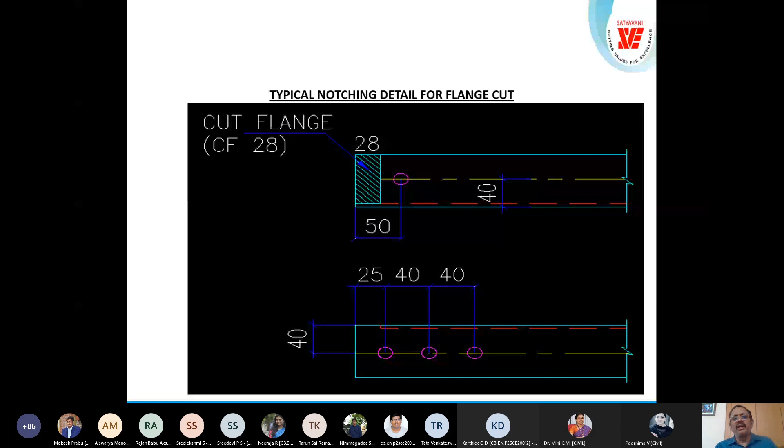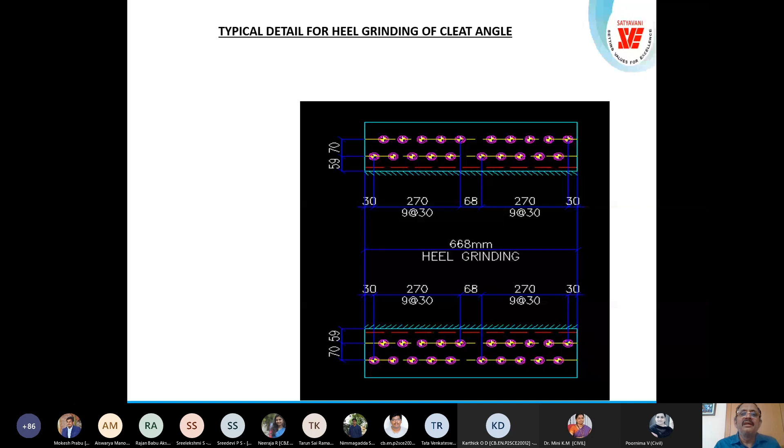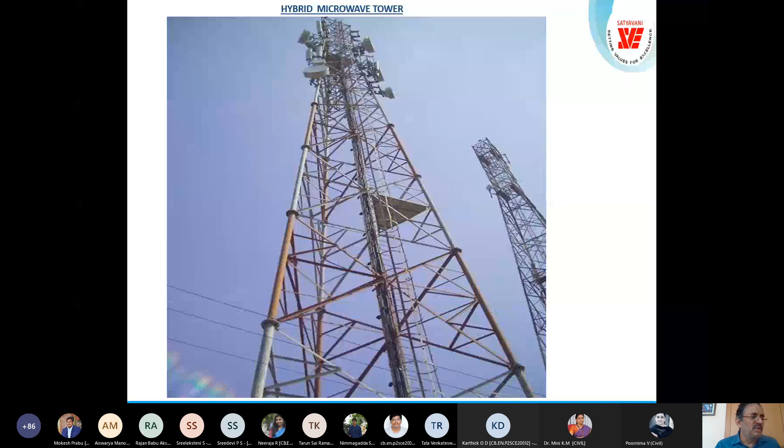You see these pictures when you travel, and we design all this kind of towers and road crossing, river crossing, and hill crossing, and tubular microwave towers, which we see almost in all the states across the country, including Northeast. We designed these towers and these antennas. If we are using the phone today, cell phone means these are the towers behind. So this is my talk about this steel structures detailing and the erection, fabrication, and quality.

And now I'm open to questions. If you have any questions, you can do it. How do we close this? Yeah. I hope I'm clear enough for you to follow what I'm talking. And if you have any questions, you are welcome to ask me. We have 20 minutes time. Yeah, we can ask questions. I'm not able to hear anything. Students, if you have any queries, you can ask.

Good afternoon, sir. Yeah, please tell your name. Sir, myself Mokesh Prabu. First year SCE, sir. Okay. Sir, can you explain me about some difficulties you faced while combining concrete and steel structures because they have different type of expansion, etc. Yeah, that's a very good question.

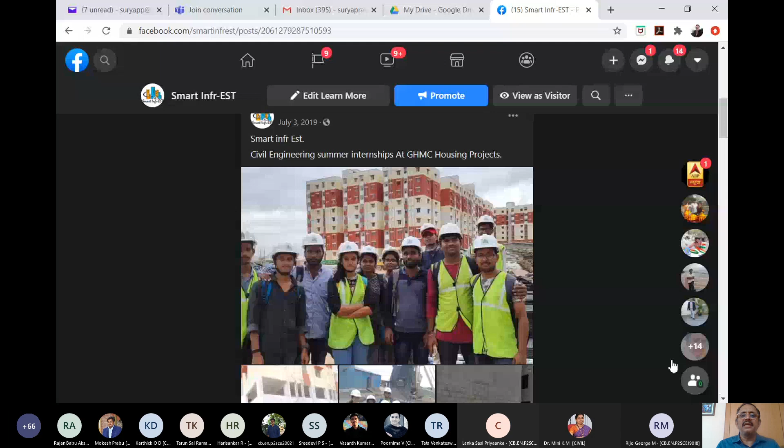And also my YouTube channel, in my name, Ponnada Surya Prakash. In that channel, all the videos, my lectures, are available. I just want to show you the internship post actually. Oh, sorry. I have to see my post. Yeah, here you can see, this is the post of my internship team. This is the students at the project site. We have done the housing project, where they have done the audit of each flat with the checklist formats given, the snag list. This is the students who have done it.

So many people come to us. You can see more posts like this on my page. This is the Smart Infr-EST page, and you all can connect with us. Thank you. Thank you, madam. Thank you, sir.

You said about online training, no? So recently, you are going to conduct any program, sir? Yeah. Online training program for the students. We'll announce probably once this examination period is over. Okay, sir. Okay. So thank you very much. It is somewhat helpful to the students, and we look forward to connecting with you. Definitely, we'll keep in touch with you, sir, because we want to have more experience and exposure from you. Your support is required.